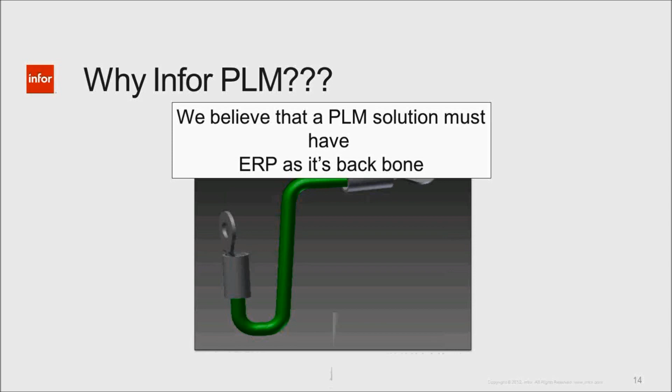So as we start walking through this PLM solution, Infor really understands that it needs to have ERP as its backbone. That becomes so very important for really understanding the life cycle of your files, managing your files, and having a solution that fits the rest of the business.

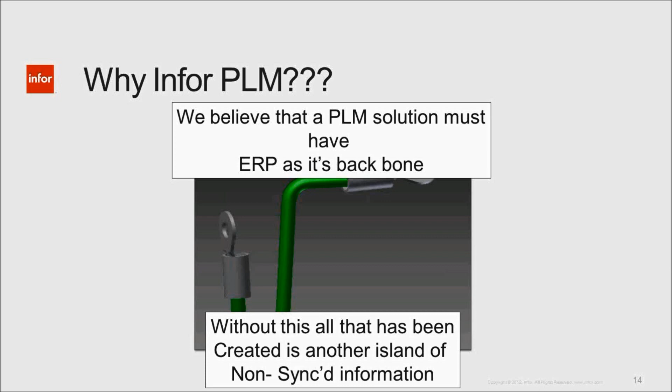Without that critical synced information with SyteLine, all we're really doing is collecting a bunch of information out there in a disparate island. It's not synced, and more than likely still a manual process. So we're going to solve that with the Infor PLM.

What can Infor PLM really manage for us? We talk a lot about our engineering and designers and all the data they're producing, the revision control, and even workflows with that, but we need to think about PLM being utilized by the entire enterprise.

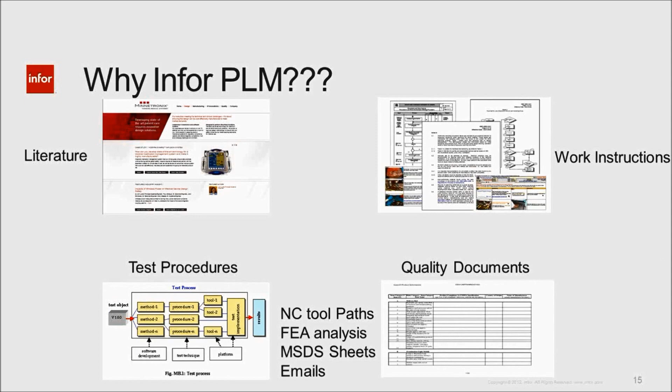It really comes down to product literature, work instructions, testing procedures, quality documents, and really any electronic file format out there - it's a tool that can be used by the enterprise. Anybody, any role, any division can definitely see value in utilizing PLM within their role.

Typically, what we're solving for companies - we see a lot of companies built up this way. It's the idea that engineering has all this data they need to share with others - manufacturing, procurement, sales, service, marketing. How do they share that information today? A lot of times we see file folders living on a server somewhere, and we email some information or even walk it over to somebody.

But as soon as we hand off that information, we're out of sync. We have a broken link there because it's more of a manual process, and not everybody's looking at the latest and greatest revisions along the way.

Also, how are we notifying these other areas, these other groups inside the company of potential changes to our items - be it testing procedures, quality documents, or engineering data? Is it a phone call? Is it an email? And how are we tracking that information? Again, we really need to stay connected.

And if we think about staying connected, we really think about securing a single version of truth for the enterprise. So everybody who wants to participate in utilizing PLM will have a single database to store their data, their documents, revision control them, be part of workflows and business processes and approvals, and really just track our data.

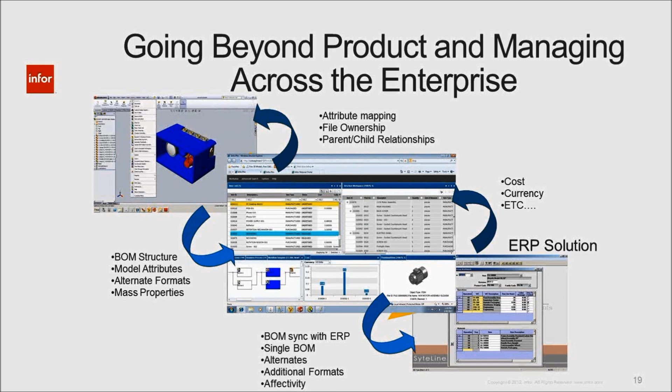Another great benefit is having a bi-directional relationship all the way through one integrated solution. Now we're able to take a look at cost, maybe inventory, and all that important information we need as designers as we're going through and creating our designs, working on our projects. We can share that information all the way back into the CAD environment itself, so it's one fully integrated solution.

From here, I'm going to move into what the product looks like and what PLM can do for us. I'll touch on a few different areas: I'll introduce you to PLM and look at the user interface itself. We'll talk at a high level about managing documents within PLM, some of the easy functionality to do that. We'll take a look at the CAD integration, item master creation, controlling the bill of materials themselves, a quick look at workflow, and most importantly, that SyteLine integration and the different touch points we can have with that, and the value that comes along with it.

The first area I'm going to introduce you to is PLM. If you've seen our product in the past, we have a brand new look to it that we're very proud of. Even though we've been doing this for about 25 years, it's all about keeping our product up to date, listening to our customers, and adding the functionality they need.

To do this, I'm going to go over to my demonstration environment. Here's kind of a PLM warm-up, a little light stretching for us today. The area I have up right now is called our work area, and under each one of those is a different work pane, so I can bring up information extremely easily. What's unique is we can personalize it to our role, the information we may need to see coming from our PLM solution, that data living inside that database, that vault of information, that single source of truth. It's easy access here, and many times just a right-click away.

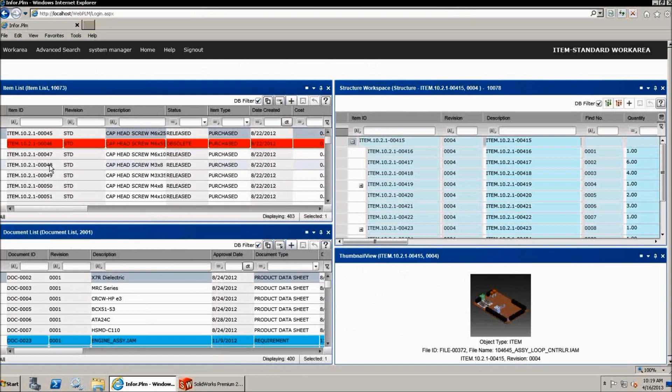If I want to look at costing on maybe some of these fasteners I have up here, again, a simple right-click away just to bring up a costing window. I can go ahead and close my document window here.

Now what I just need to do is maybe look at a couple different variations, some simple drag and drop functionality to take a quick look at that costing information. Again, maybe now I need to choose something inside of this design to go ahead and move forward with. So again, just easy ways to access information inside of PLM.

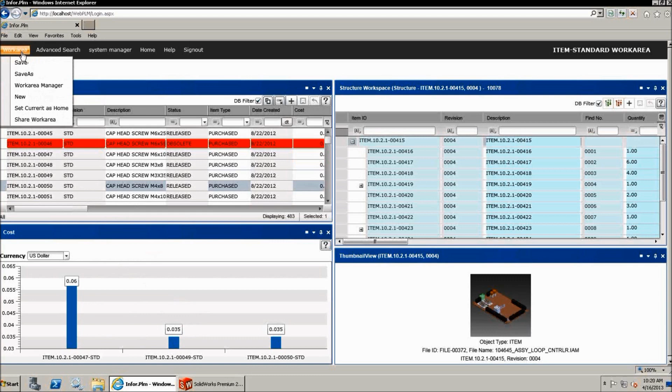As I mentioned, personalization becomes very important, so users may need to see different aspects of information due to their role inside of the company.

So we can always easily create a brand new work area. We can also save out these work areas as our favorites or templates, so we're not recreating all the time. We have that available to us under our work area manager, which can list all those favorites or templates living inside of the system.

Again, if we want to standardize across the business, here's a great area to do it. Everybody can have the same look or feel as they need to complete their roles inside of the company.

Or we can personalize these, build them up as needed for the use that we have, and again it's just simple drag and drop functionality to build these different types of work area environments. So here I just created an area that I'm going to be utilizing next for just a documentation of PLM.

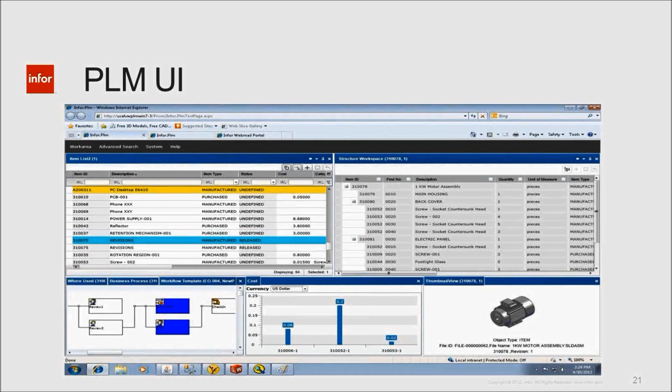Okay, so the next area I want to talk about is just a little bit about document control. This is really thinking about the idea we have PLM up and running, it's fully implemented, and I need to add documentation to it, be it parts, material specifications, you name it, any electronic file format we can manage inside of PLM. We're fully integrated into the Microsoft Office product, so we can do our check-in, check-out, revisions, and so on with those.

We can actually highlight those different things inside of the attributes of those files, and that's a nice visual cue. Also we can utilize PLM to help us filter out documents of different types for us in the future.

Also, we can set up mandatory fields so people have to fill out information as they're adding this documentation to the PLM database itself. So again, very user-friendly. You're going to have the ability to personalize the critical information that's important to your business when defining these attributes.

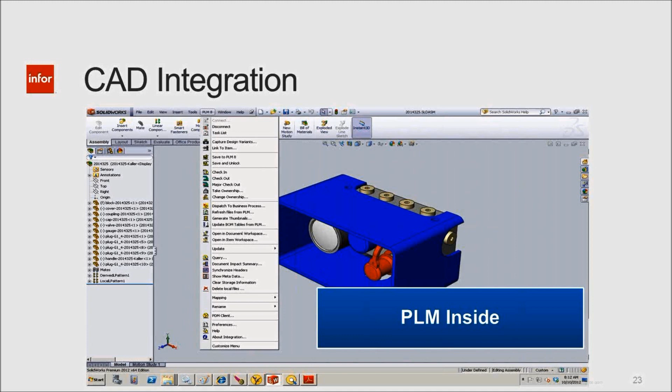We can go through, as I mentioned, with the CAD integration—this happens to be SolidWorks, but all the major CAD systems, mechanical and electrical, we fully integrate into. With that integration, you're going to see us living inside of the CAD user interface with all the typical functionality an end user would need: check-in, check-out capabilities, kicking off workflows or business processes, taking ownership of files when working with a group of others, searching information, and so on. All of that lives inside the CAD environment, keeping end users focused on the task at hand.

What also happens is the idea of controlling that information before we send it to SyteLine, and that's the automatic creation of the item master—understanding that data from the CAD itself, bringing it into PLM, creating and matching up our item information to those CAD files, so we can eventually deliver into the SyteLine environment.

So I'm going to combine these two in the next portion of the demonstration. I'll open up one of my favorites here and hit home. If we think about a CAD designer or engineer, they come in the morning and start doing some fantastic modeling inside their environment, creating drawings and so on. What they're doing is creating all those individual models, sub-assemblies, and important information, typically applying attributes and properties to those individual models to fill out a bill of material.

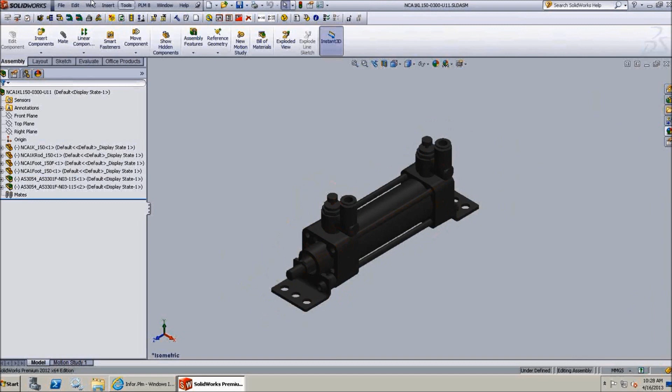With this design, if I want to take this information and publish it to PLM, again, it's very simple. I can do a save and unlock of that information to PLM. A couple things are happening for us: one, it's generating that item master for us, going through and making sure there's no duplication of item numbers, and it's creating any PDF files or other neutral file formats that I'd like the system to create.

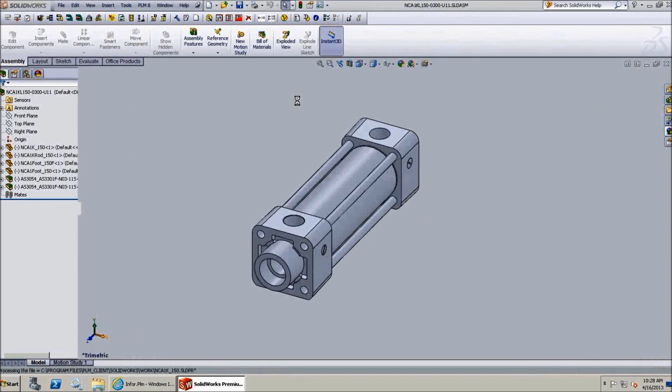Again, it's really assembling that metadata from the CAD environment into that item master for us inside of PLM. It's going through that process just as it would normally in CAD, as if you did a save to a file folder on your server. What it's done for us is go through our environment and create our item master. I'm going to go find it real quick here.

I'm going to find my file, take a look at the latest and greatest, and bring up that item master, that bill of material. Again, that same structure we saw in the CAD environment with the sub-assembly and everything has been completely captured for us, and any metadata we have mapped between PLM and the CAD solution has been captured for us.

In this case, I had my item information match my CAD file information. But in many cases, you can also have this create item information that may be completely different, that needs to live inside of ERP, still of course having that relationship back to the CAD file. If we think about bill of material control, consider consumables out there. A lot of times, even as a designer, we didn't add in all of our fasteners and washers, and we didn't define paint, grease, and things like that inside of our CAD environment because we wanted to keep our files healthy and light, easy to work on.

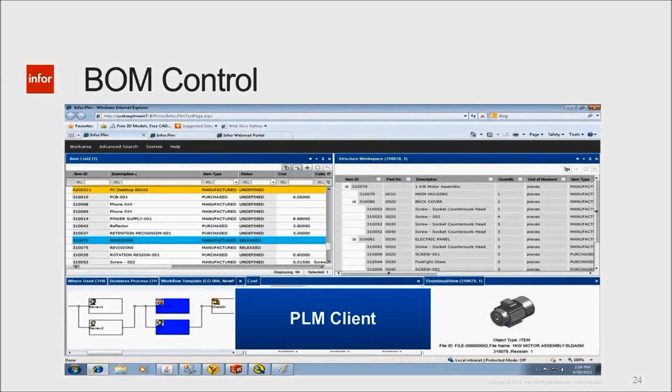So as we think about moving on in the process, what we've done so far: we started off in the CAD, created a model, published that information to PLM, our item master was generated, and we tweaked that bill of material a little bit. Now it really comes down to the idea of thinking about workflows inside of the company.

What PLM can provide is workflow solutions. This is really just matching up to typical business processes a company may have, be it a new product introduction, an approval process, some type of engineering change notification or change order. Really any process you have inside of the company, we can match workflows to be as complex or as simple as you would like them to be.

I have a variety of customers out there today that have a single-step workflow, so as they publish information to PLM, an auto signature is applied to the file and it's automatically put into a release status. So when we think about automation inside of our workflows, there's a couple different ways it varies. Automation includes notification, email-driven, task list-driven inside of PLM, communication with other business systems like SyteLine, and even automation inside of our designs.

If we have a design that's maybe in an unreleased state and it goes through an approval process, the system can automatically put it into a release status. If we'd like it to automatically send to SyteLine, we can also have it do that at the same time.

So a very powerful solution. That solution becomes extremely powerful when we think of time of change and being able to notify SyteLine of potential change of an item. So now someone in SyteLine could actually go through, look up a job number, look up a purchase order, and really see what that change is going to affect.

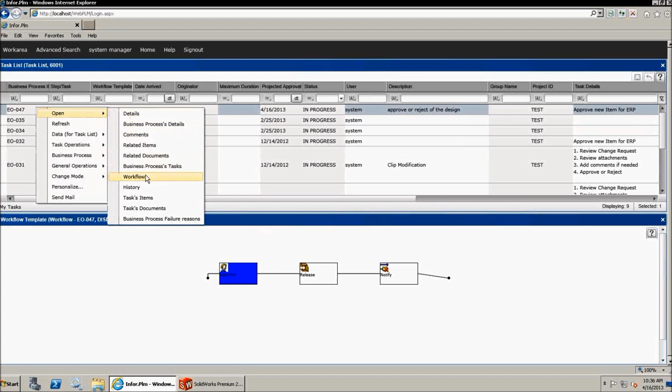Well, if I want to dig a little deeper—what if I want to say, well, what is this item? What's it made of? What's the structure look like for this item? What is it? So I need to do a little deeper investigation of that information.

Now I can actually bring that item up. I see it's a cylinder assembly. In this case, you know what, I want to take one more deeper look.

Maybe I want to see if it's structured. Again, this is just information that's just a right click away. We can get as deep as we would like or keep it as simple as we would like, and that's very important.

Now I see that structure, I can kind of understand it, but I'm probably a manager. I don't use CAD all day long. I don't even know how to turn on a CAD system.

With our PLM solution, what we're going to provide is an enterprise viewing tool. This allows us to look at about 250 different electronic file formats. We don't need to pull CAD licenses for CAD data. It can handle all the different CAD data, the drawings, the 3D models, PDF files, 3D PDFs, TIFFs, images, Word documents, and such. The enterprise viewer will go through about 250 different electronic file formats and allow us to view these files without having to use licenses from other applications.

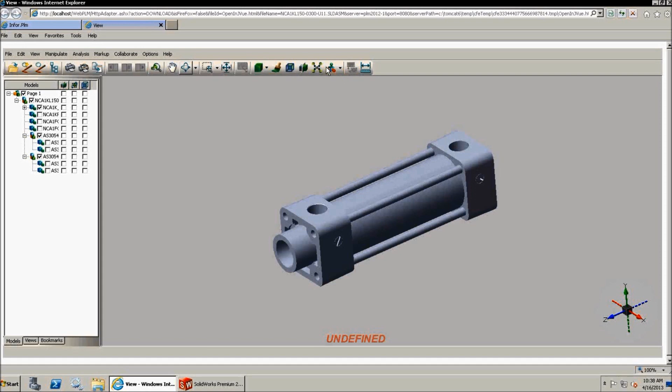The viewer also has a lot of powerful functionality, like your typical red line markups, that we would need to collaborate back and forth on a design. If I'm in the manufacturing world and someone forgot a dimension on a drawing or even a 3D model, I can go through and do some investigation. I can add some section cuts, take some dimensional information. Everything's there for me to quickly get to the problem, continue with my job and role, and communicate it at the same time by red line markups or adding information to the workflow process along the way.

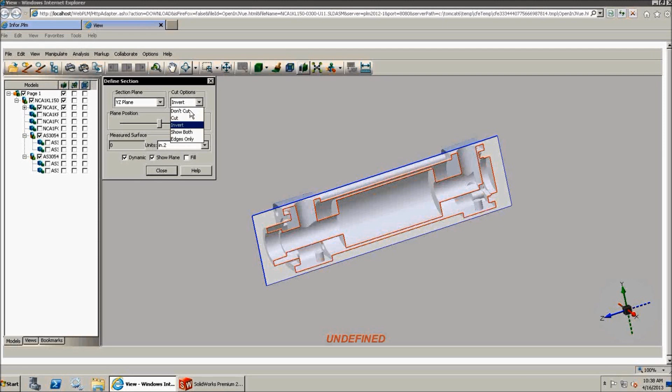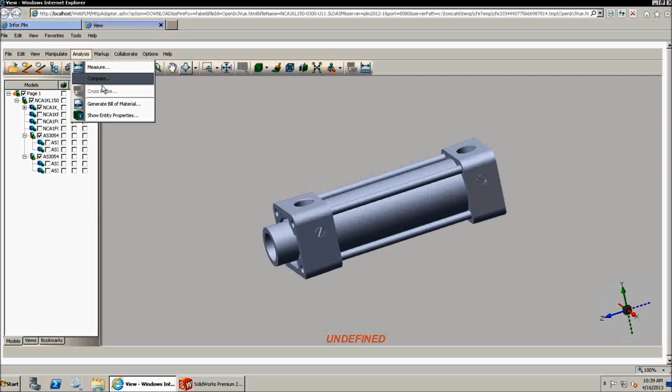Some other important tools here include the ability to create exploded views of assemblies, maybe for creating work instructions and things like that. We can also do some other analysis - one of my favorites is the compare feature. Being able to take a revision A to a revision B, bring them up on the same screen, and have the system highlight the changes between those, whether it's a Word document, a drawing package, or 3D models - the system will do that compare functionality for us.

So that was a little bit on the enterprise viewer.

Getting back to my workflow, I've gone through and done my investigation. I have some different options here - I could add additional information to the workflow itself. Maybe I found a testing procedure or a material specification that needs to be attached to it. We can go ahead and do that, or we can go through and approve or reject the item itself. Very easy to do. A rejection could take us one step back inside of the workflow, or we can pick and choose where it makes sense to route it throughout this rejection. So you have a lot of those different options available.

In this case, I'm just going to go ahead and approve the item, and approve the individual task of that workflow. I'll go to the task operations and approve that, and we saw it come off my list here. So with that, we've gone through the design itself.

I'll go to my home page here, and now we're going to take a look back at that engineering data. In this case, I'll probably have to bring up that item master again, because what the system did for us is it took us through and put us into that release status. The automation happened - it's put all of our files into a release status, and at this point, with that approval, I could have used workflow to send this information over to SyteLine, or there are other ways of going about it.

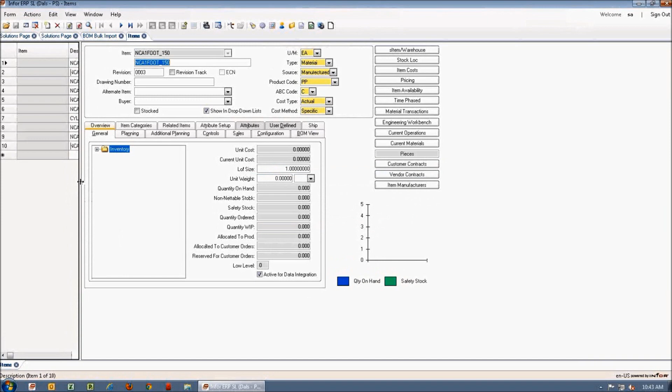Now on the SyteLine side, we passed that information over to ERP, and we'll go ahead and bring up SyteLine. So now I need to go find my information. I'll do a simple search on it. I didn't remember the entire file name, but I know it's going to be NCA something. So I'll take a look at this information, and again, just a simple double click.

So one of the first touch points with SyteLine is the passing of that item master information into the environment. This came directly from our PLM solution. The sub-assembly that was there, that whole structure came across for us. Again, a very automated process, took out all that manual input as needed.

Another very important touch point for us inside of SyteLine is not only passing this information over in an item type of configuration, but what about the supporting documentation that goes along with it? Are there PDF files that are needed? Does someone need to actually see what this information looks like?

So now if you're utilizing DocTrak inside of SyteLine, DocTrak would be looking at the PLM database. That becomes important because now we know the extra documentation coming along with this item information is being controlled by PLM. We know it's the latest and greatest, and we can go ahead and browse out to that information for this given item.

Again, if we need to view it inside of SyteLine, we can take a look at the PDF file, maybe bring up the 3D model, the drawings, etc. Again, just a very nice touch point, and of course it's a controlled touch point - the latest and greatest information coming from the PLM solution itself.

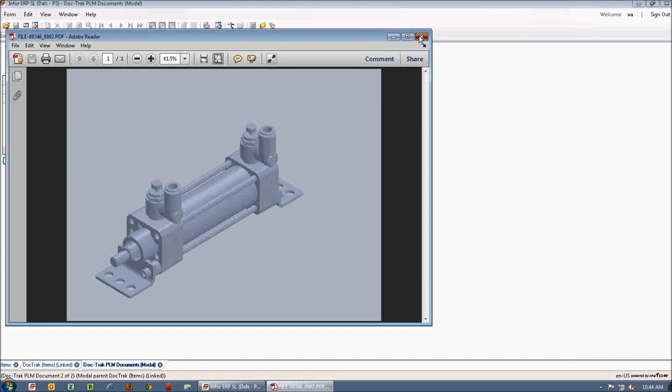If we expand a little more on touch points with the ERP, another area can be the ECN, or the Engineering Change Notification. It can be one of the workflows produced from PLM notifying SyteLine along the way. If that does come through, now I have the ability to have those notifications, find out what job or purchase order they're going against, and act accordingly to those changes.

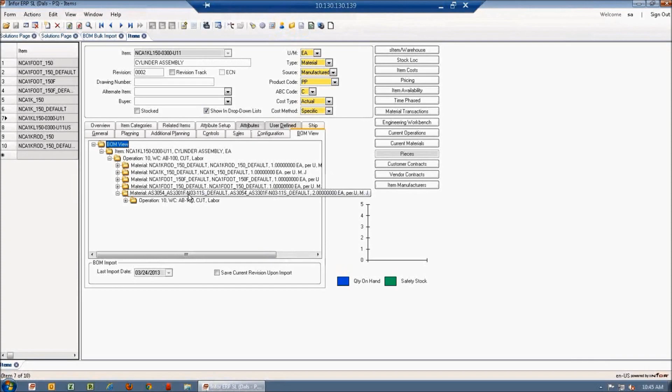I think another important touch point here with the SyteLine environment is really getting back into the CAD environment itself, or I should say the PLM environment itself. I'll be able to take a look at some of that costing information, inventory levels, where this information is residing, what warehouse. All those things are going to be possible through the communication between the two systems.

So really 3 or 4 major touch points there, giving any business a completely integrated solution, from CAD to PLM and then PLM into the SyteLine environment.

And again, on the same terms, even with SyteLine, as you go through your upgrade cycles, no third parties involved, no custom code written. It's just an integrated solution that isn't going to break for you as we're doing those upgrades. That becomes very important, not just for the IT maintenance portion, but also if you're using some type of third party PDM provided by a CAD vendor, we're taking away all that extra maintenance needed with those other solutions.